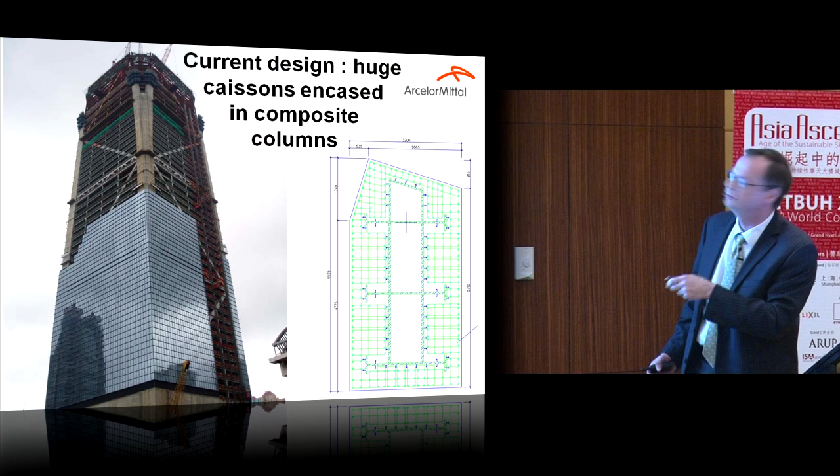Here is a view of the Ping An Center that will be built in Shenzhen, what will be one of the tallest buildings in China in the near future. It's under construction right now, and they are using composite columns. This one is 6.5 meters by 3.2 meters, so it's about a quarter of this room, just one column, using heavy plates all welded together, with all the plates tied together.

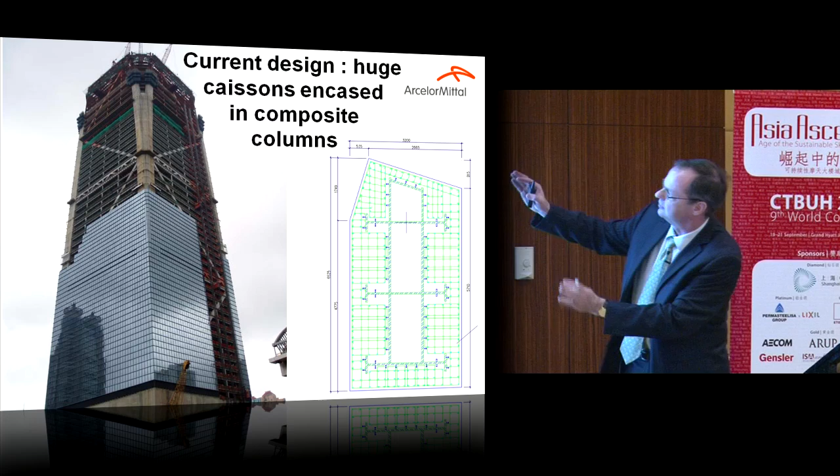So when you have to design this type of connection, the difficulty is there is no exact welding procedure today for how to weld this type of section. Do you start the welding here, or there? And on top of that, how do you splice all these joints when they're stacked on top of each other? It's highly complicated. If you follow the welding codes, here they are using 65 millimeter and 50 millimeter plates. According to the codes, you must preheat the whole section at 110 degrees centigrade before and during welding.

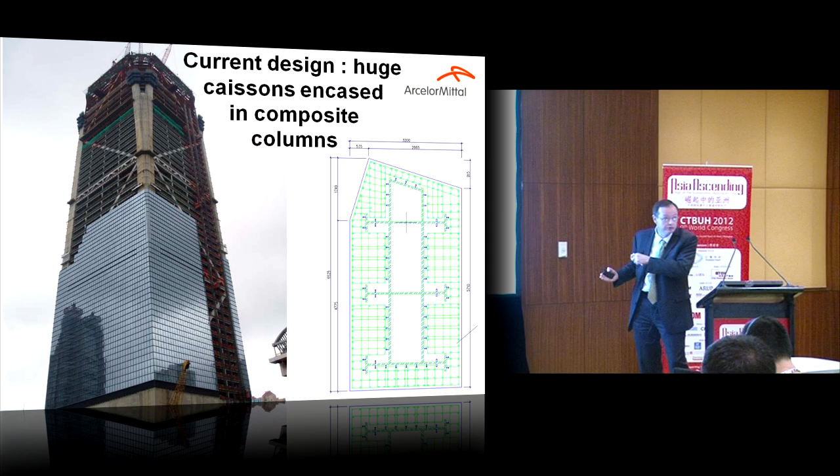So if we go to the Jin Mao, on top here, you can see now how they are building the Shanghai Center. They use the same concept - it's designed by the same designer. They use huge caissons, all tied together to form this mega column.

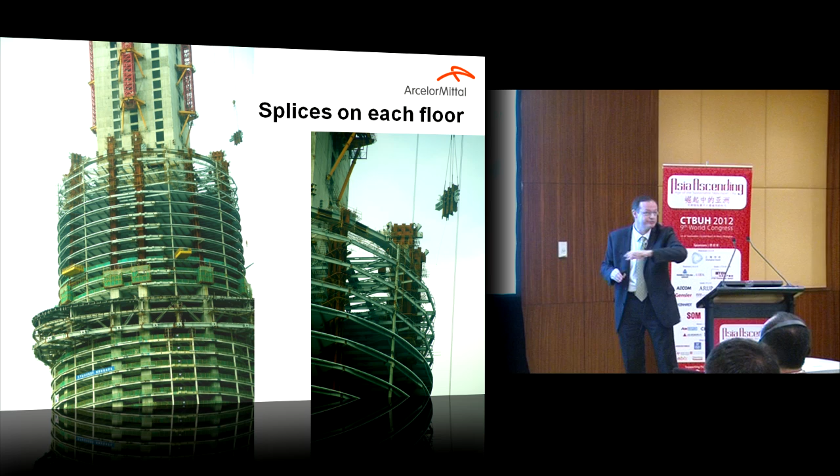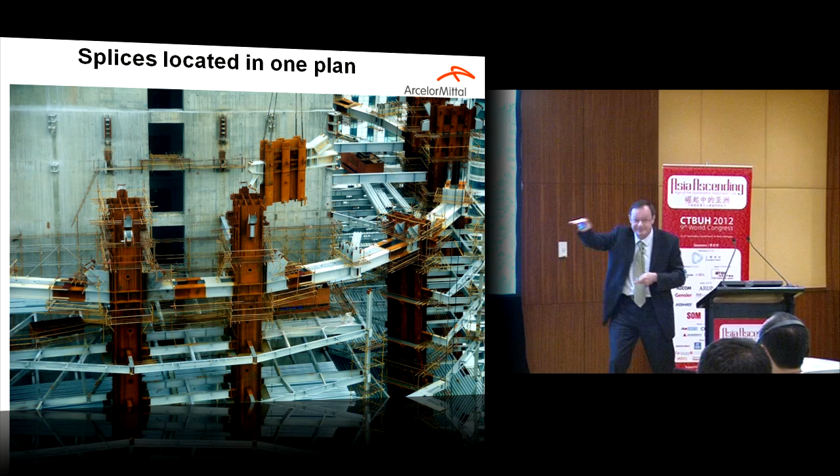These huge caissons are so heavy that they have to stack and weld each floor, because the crane is too small to lift multiple floors at once. I took this picture during February, and here we can see this huge caisson going in, and I saw another one this morning because my room is exactly on the 58th floor, so I can see exactly how they are doing it. So this caisson goes in, and a few minutes later they were welding it.

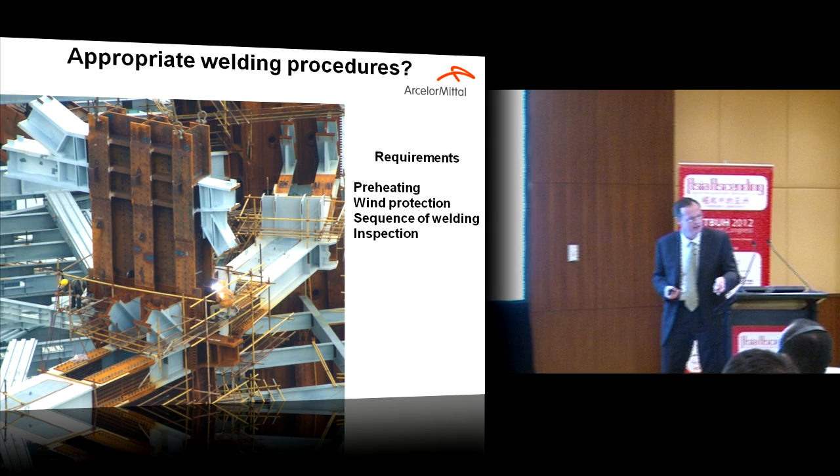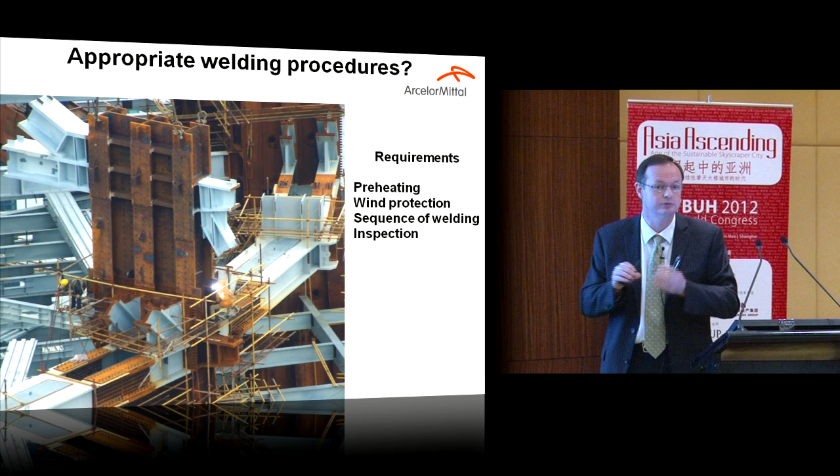At that time, in February, it was 2 degrees Celsius outside, below the dew point. Normally when you take an electrode and touch the steel, immediately you get condensation of water. After Northridge earthquake, and after the Kobe earthquake, they changed the way of doing all these types of connections to control exactly how welding is done.

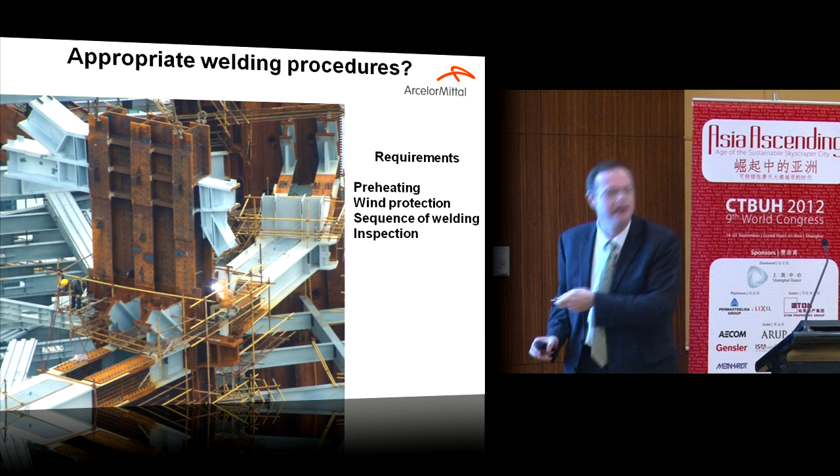So according to the codes, first you need wind protection. You need one guy with a torch to preheat all the connections to 110 degrees. To preheat this type of connection will take maybe 10 hours with a torch, and then a welder can come and start the welding.

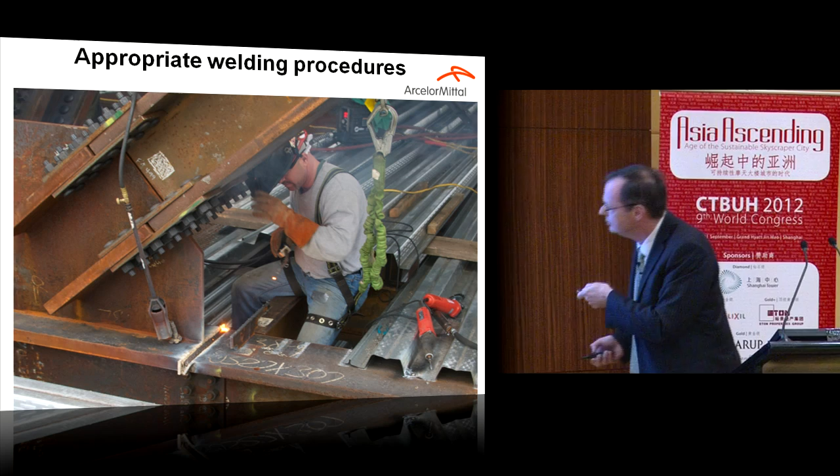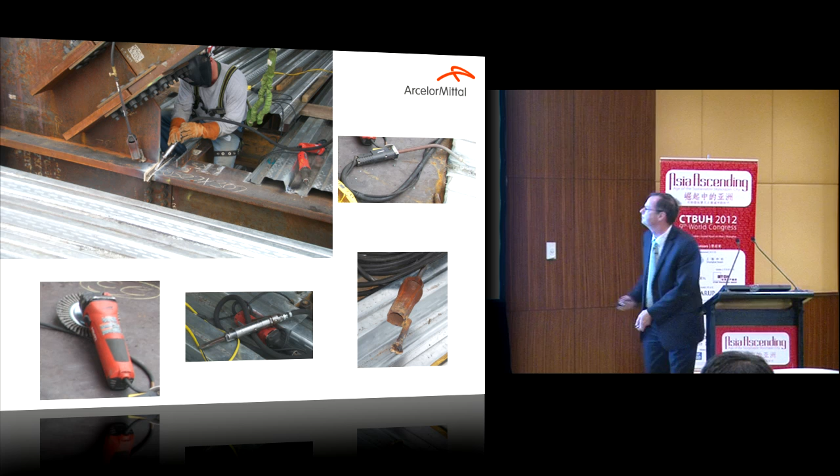If you go to the States - this is from slides from New York, from a new high-rise in the States - when you see a welder, and we will see tomorrow if you go to the job site of the Shanghai Center, they have tools all around: a grinding machine, a hammer, and a torch. Because even if the steel doesn't need to be preheated, you must remove the moisture if you follow the codes, the D1.1 codes, for example AWS. And after each pass, normally you have to remove the slag, so you need a hammer for that.

Here, if you take your ear close to the window of the Jin Mao, in your room, you don't hear anything - just a little bit of how they are doing the welding. You don't hear a hammer, so they are not removing the slag. That means in all the welds today, you have tiny cracks.

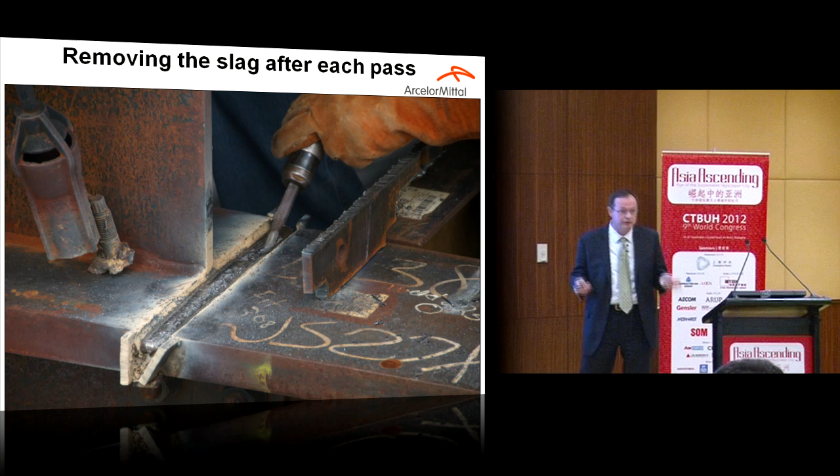Unfortunately, and it's the same in Beijing, it's the same everywhere in China from what I've seen - you need a catastrophe, you need a big earthquake, and after that they will change the codes.

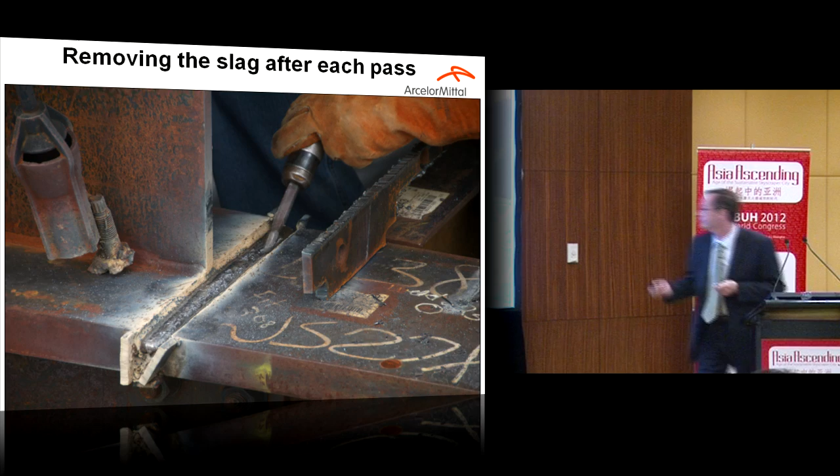After that, you also need to grind the weld to make it smooth before the next pass. And after that, there should be an inspector on the job site who will do a UT test - if you have a full penetration weld, you must do an ultrasonic test.

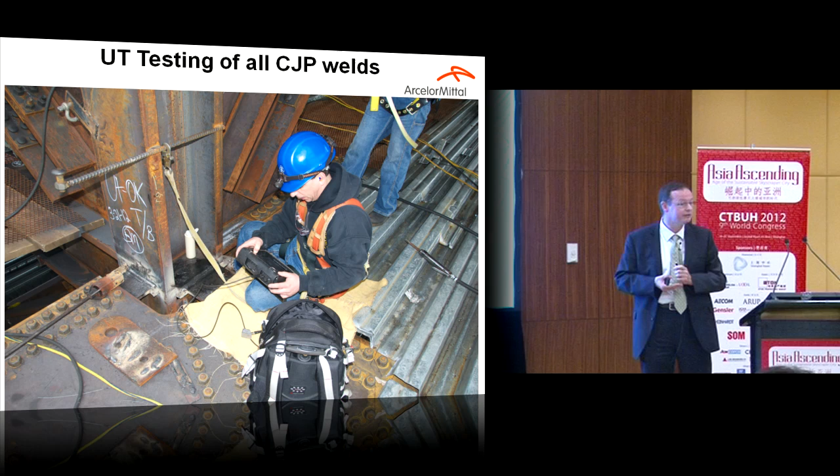When you talk to a steel fabricator in the United States and ask them how many times they have to repair the welds, they say about 10% - they have a defect, then they have to grind, refill, and correct the weld. When I ask Chinese steel fabricators how many times they need to repair the weld, do you know the answer? Never.

So I guess that in the future it will be a big problem once we have a big earthquake here, maybe in Beijing. Beijing will be the big one, and maybe in Shanghai.

Today we have high-performance steel available, and since the 90s we have even 460 megapascal steel, produced with a quench and self-temper process, which has very good ductility and very good weldability, and doesn't need to be preheated.

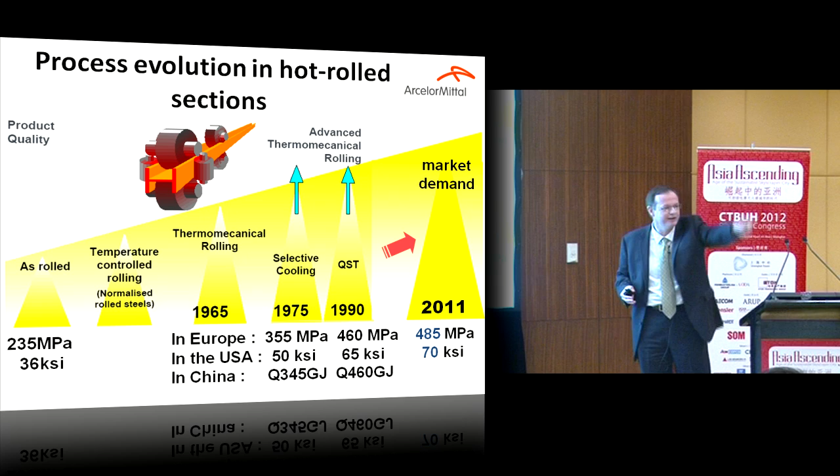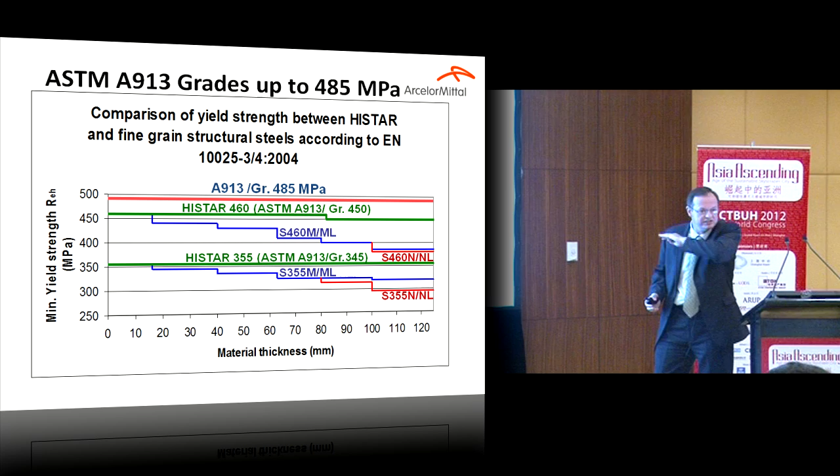We can produce steel available today in different grades. In the Chinese grade, and it's the same in Europe, the yield decreases with the thickness of the material—if you have thick material, the yield decreases. But in the United States, we can supply steel with the same yield for all thicknesses.

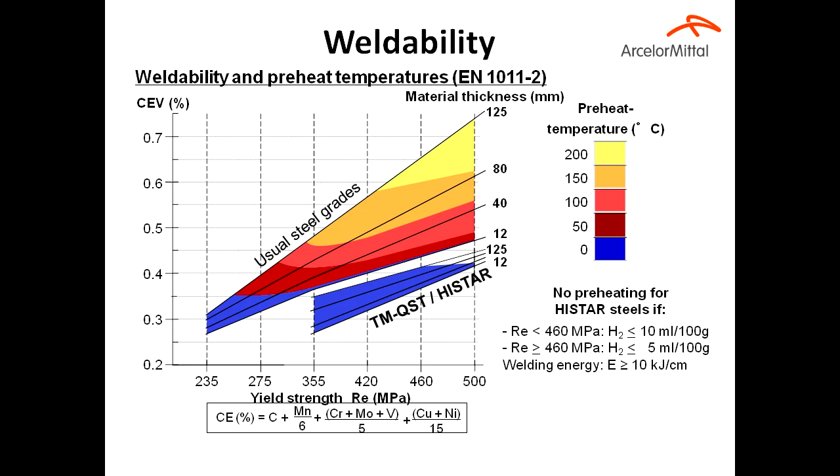When we have to increase the yield of the steel, we have to change the chemistry—we have to put more alloying elements into the steel. If you use the classical way, what we call thermomechanical steel, for thick material you have to change the chemistry so much that the steel is not weldable anymore. This is why you have to preheat the steel before welding.

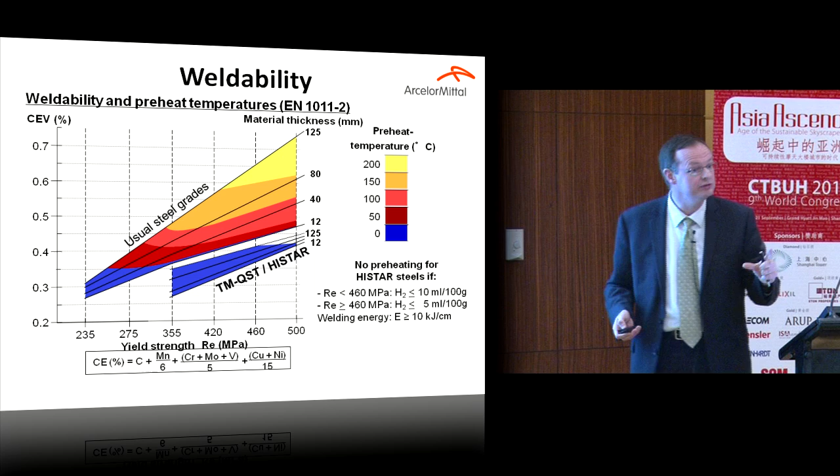By using the quenching and self-tempering process, we can produce high-strength steel with very good ductility and very good weldability. This is an example of a splice in a jumbo, which I think is what we supplied here in this building—this is 125 millimeters thick. If you use a normal 355 megapascal steel, or Chinese plates available here, you must preheat that at 110 degrees before welding, before the first pass.

So it takes about 5 hours with a torch, just doing that. And then to do the welding of that, do you know how many passes you need? Can anyone guess? It's 140 passes, so it's a lot, right? And it takes about 8 hours for one jumbo like this.

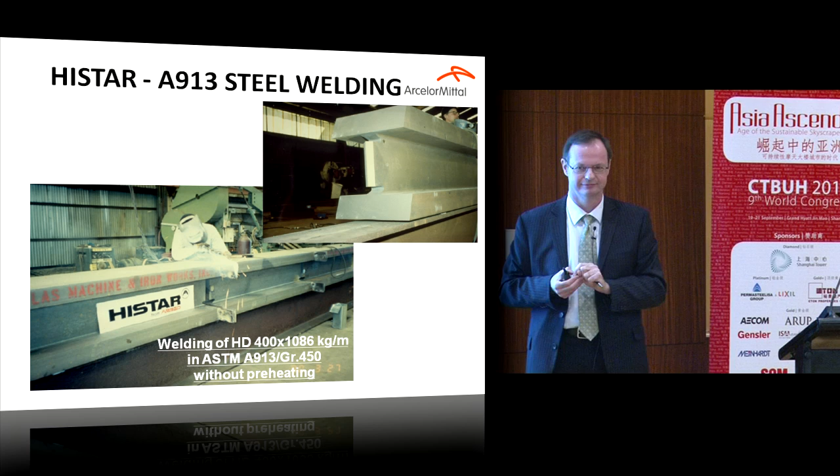Now imagine the huge caissons, because they are also using 65 mm plates. To do the welding, if they really follow the rules, it will take days. And I checked—I came 2 days ago—they did one in one night. One caisson was welded during the night.

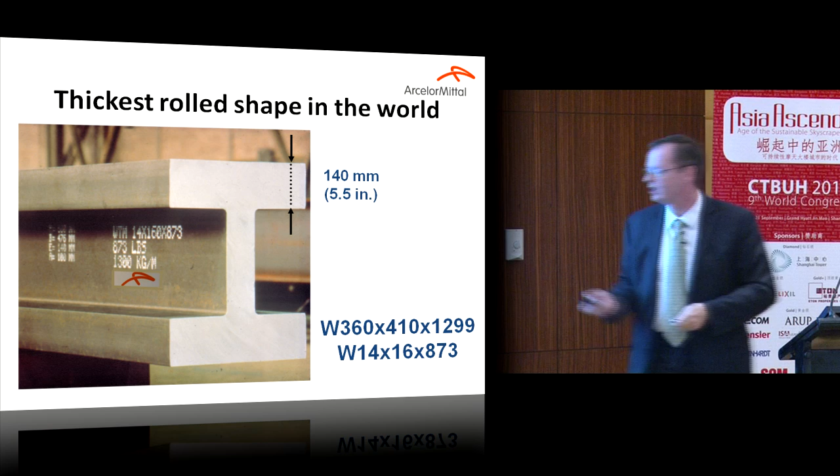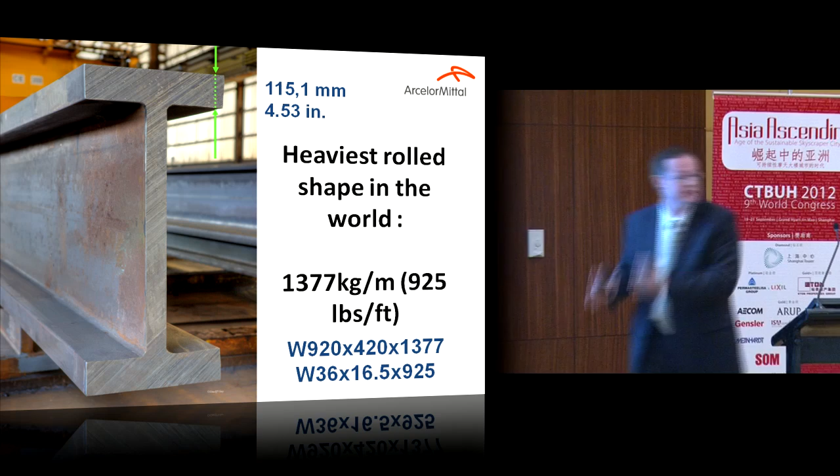We can supply heavy sections like this up to 140 millimeters thick, and we can go now today up to 485 megapascal. This is the heaviest, what we call jumbo. And this is the heaviest beam, a W36, at 1,377 kg per meter. So you can use that, and it's a finished product.

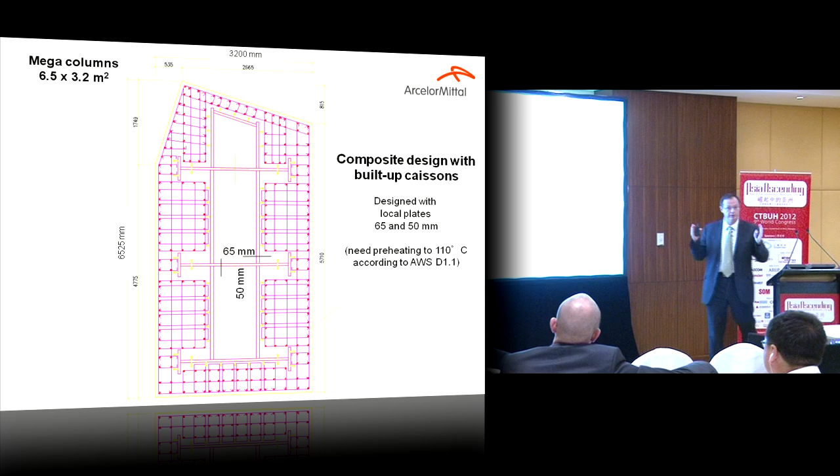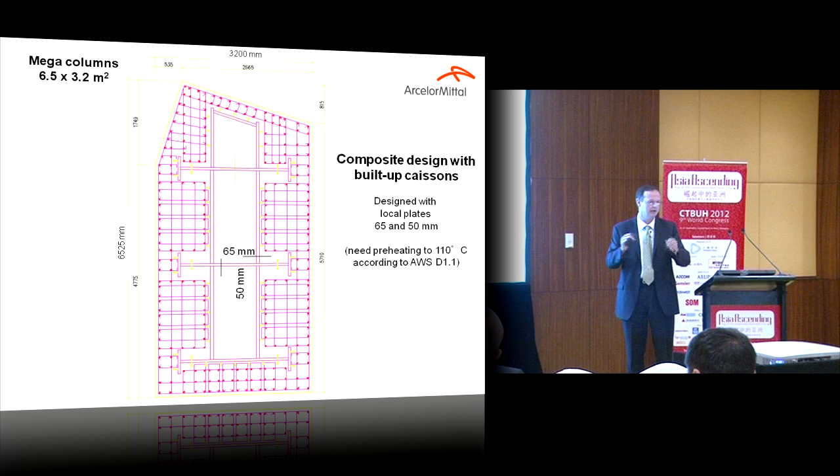So instead of using these huge caissons, in LRFD today they say you can use composite design with untied sections, built-up or rolled sections inside the composite section, as long as you check that there will be no buckling of the individual member before the concrete is dry. This is the only thing you can find today in the LRFD design code—they do not explain how to do the design.

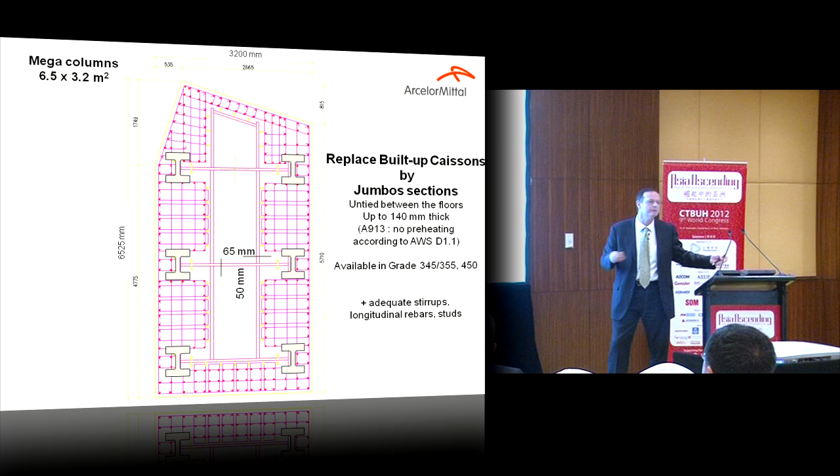So we developed a method to replace all these caissons by using roll sections, and we follow exactly all the rules given in LRFD or ACI 318, and they are based also on the examples given. You can download them—it's example number 14 from AISC that you can find on their website. So we developed this method to calculate the sections, to calculate also the stud connectors, the plates, the stiffeners, in order to transfer the loads.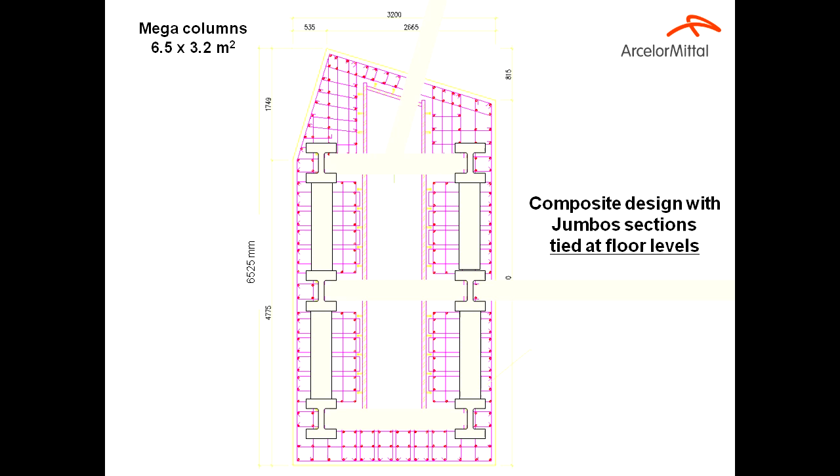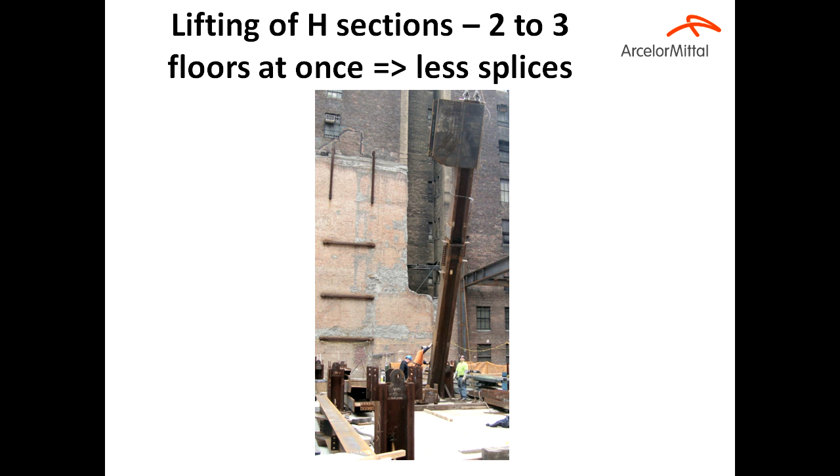We don't see it very well here, but we can use double layers exactly like in the Shanghai Center, or single layers. The advantage of using roll sections is that you can lift 2-3 floors at once with a 20-ton crane, instead of lifting one floor at a time and having to splice every floor.

This is the Freedom Tower. This is 541 meters.

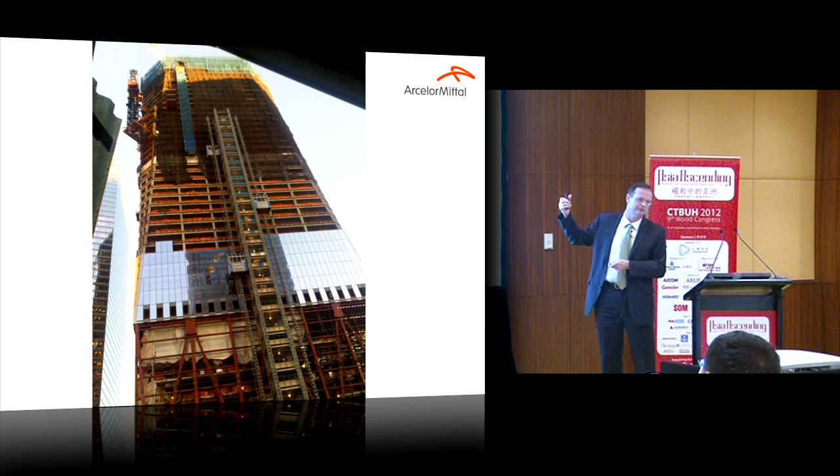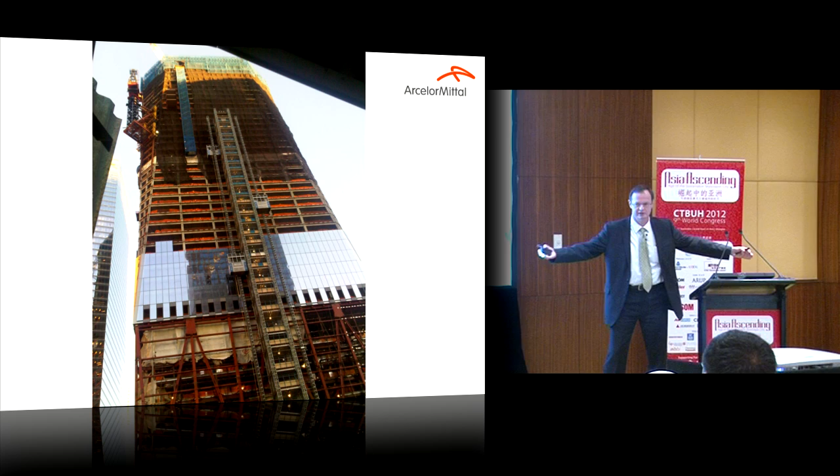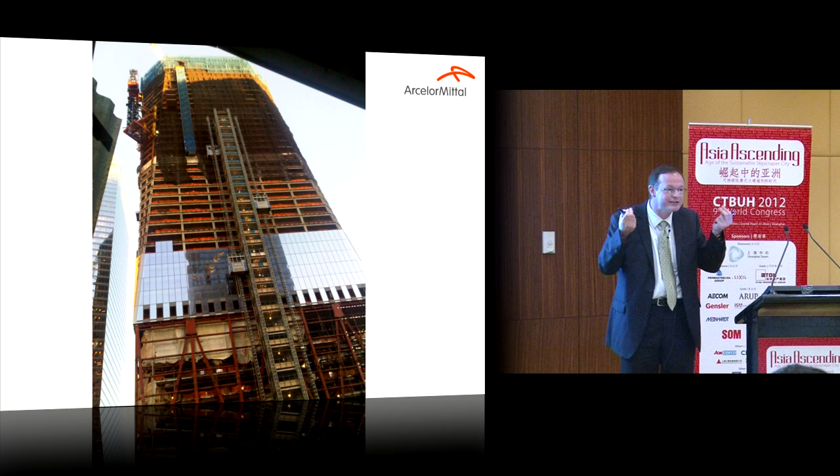The World Financial Center is 492 meters. Here, they are not using big mega columns into the corner. The architect should not put big columns into the corner. If you want to rent an office, if I'm the boss, I want a corner office with a window on the left and the right. If you put a big concrete composite column into the corner, you are wasting the most expensive place in the building.

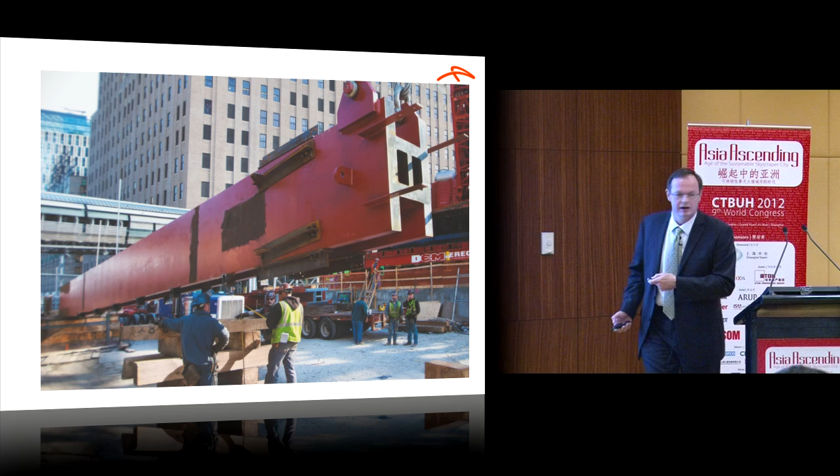So in the United States, they always try to avoid columns into the corner to have the best view possible. For this column, in the basement of the World Trade Center 1, the Freedom Tower, they use 460 megapascal jumbo beams, the same as in this column here, with welded plates in 460 megapascal. This is 30 meters, just one column, for the erection of one column.

To do the welding here, the codes say this doesn't need to be preheated because it's a quench and self-temper material. This needs to be preheated according to the codes to 150 degrees because it's 460 megapascal. So they had to preheat everything at 150 degrees, and the port authorities say you must preheat everything just to be double safe.

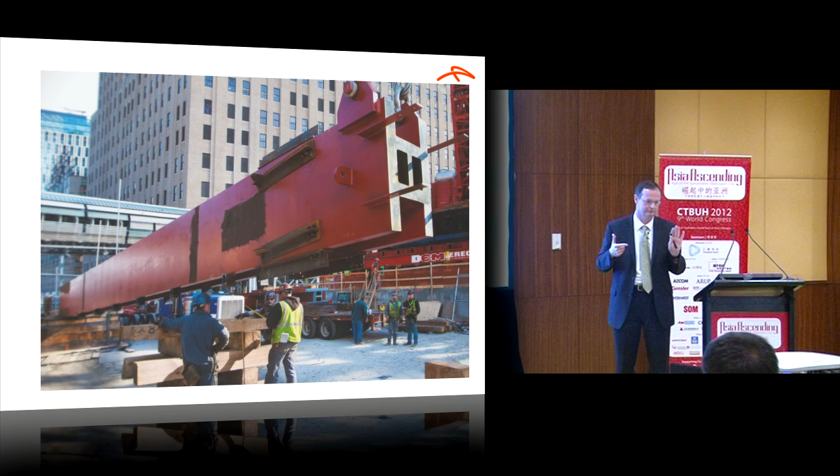This building is the safest building on Earth today. And you know how long it took them to do the welding? 7 days, days and night, following the codes. I asked different steel fabricators in China, and they say, oh, less than 1 day we do it.

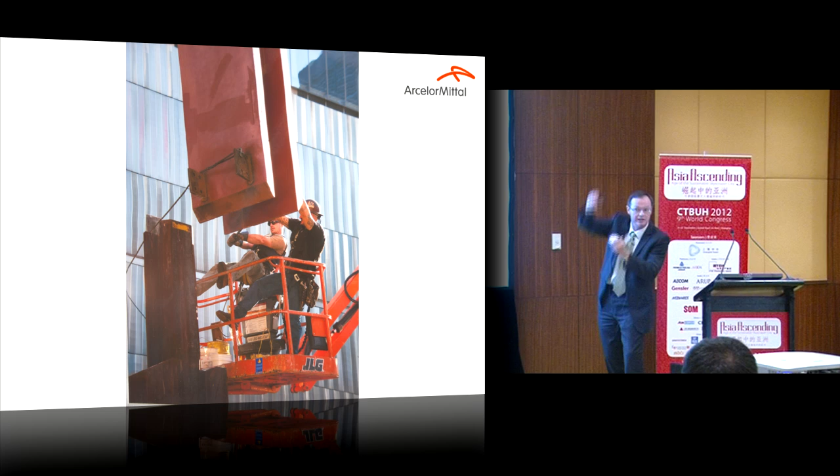On top, when you splice all this column, don't put all the welds in one plane, because if something happens to the weld, the crack will go through that plane. So in the Freedom Tower, when splicing the jumbos with the plates, they put the weld of the plates here, and they weld the jumbos here, at two different locations, to have a much safer structure.

This is what Northridge taught us. When you have to splice two jumbos, you must do what we call a rat hole - access the web, not putting weld in this region because you have a high level of stresses.

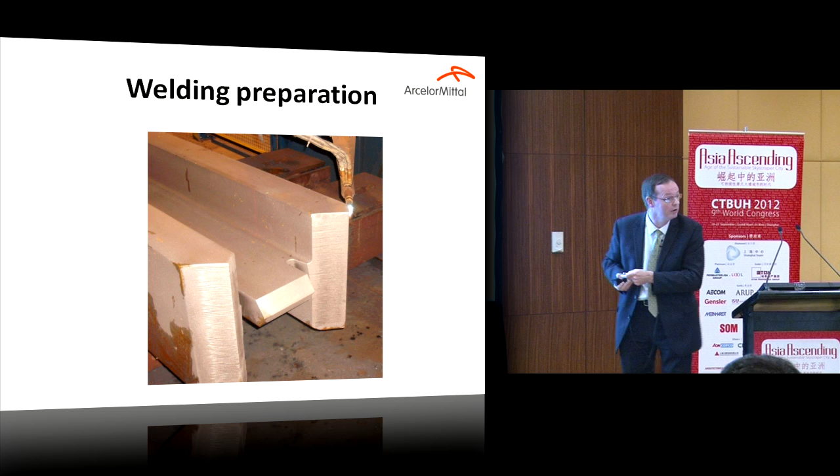When they weld the caissons, first they do a bevel. The code says above 10 millimeters, you need a bevel if you want a full penetration weld. Here they are welding just a small gap, filling a small gap between two heavy plates. So you need to do that, and you need this type of hole to limit the residual stresses once the weld shrinks.

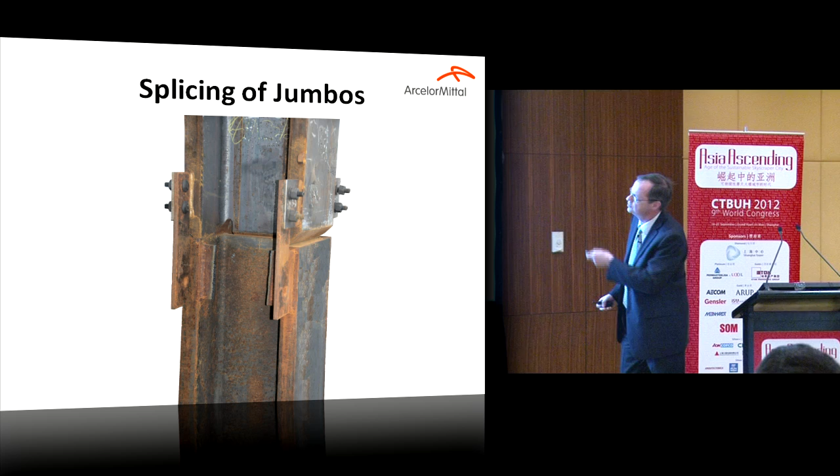So this is how the splice will look in reality. You have two jumbos. This will be removed, and this is the type of typical splice we have seen for many, many years now. This type of connection, we can teach easily to the inspector on the job site here in China, and he will see, this is how we have to do it, and then they will apply it easily.

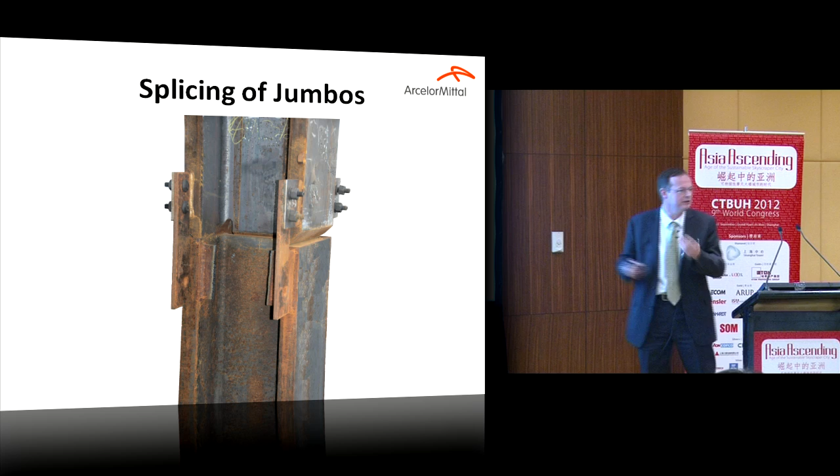So now I'm coming to this method. This is technical - I hope you are structural engineers now, and not only architects in the room, otherwise you can leave and go somewhere else.

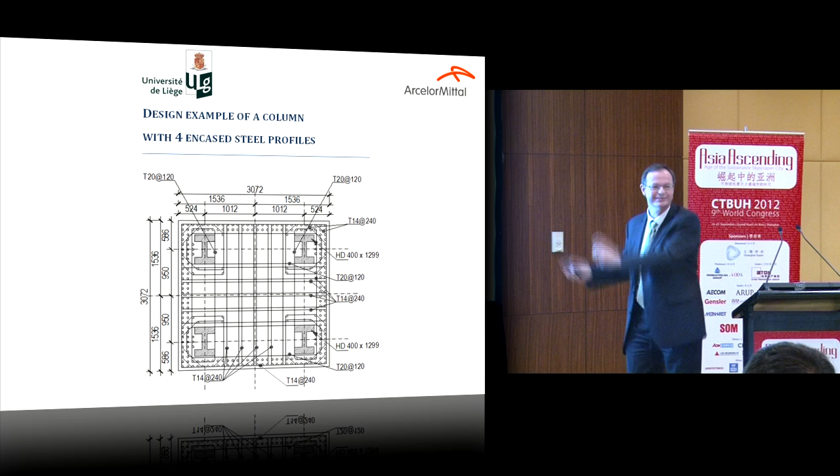So we developed this method. It's about 70 pages that you can find on our website, or you can ask me and I can send you a copy. We did 4 different examples: one according to the strong axis, one designing the N-M curve according to the weak axis, and then two design examples to calculate the shear forces.

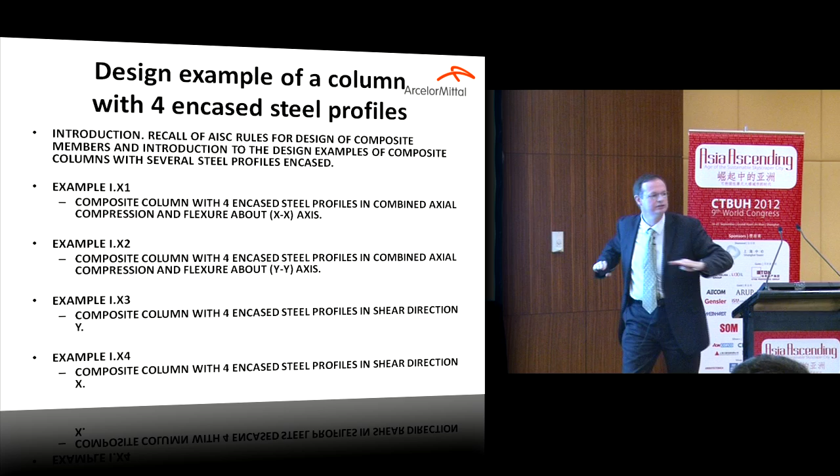We're not using new things, we are just using what already exists in LRFD or ACI 318. You know that Roik and Bergmann, in '92, invented a simplified method to calculate the N-M curve. We are using exactly the same thing.

So the N-M curve looks something like this, with axial forces against bending moment. Roik and Bergmann said, instead of calculating all the points, we calculate only four points on this curve, then draw a straight line, and that gives us the N-M curve, describing how to find it directly using different jumbos, multiple jumbos into the composite sections.

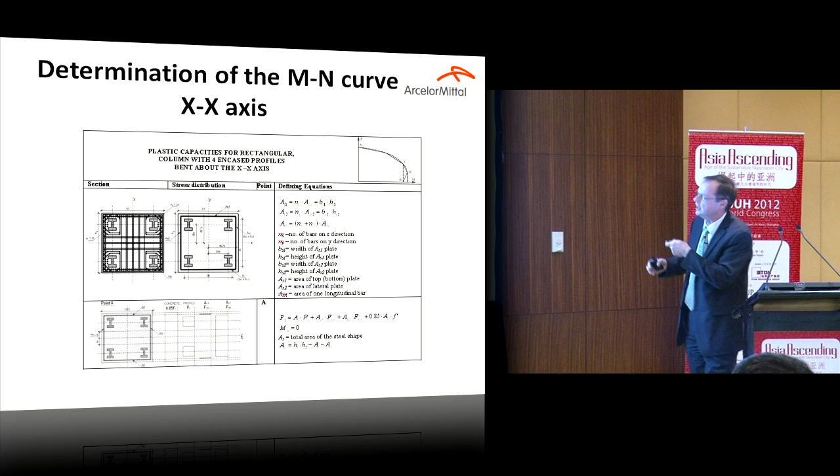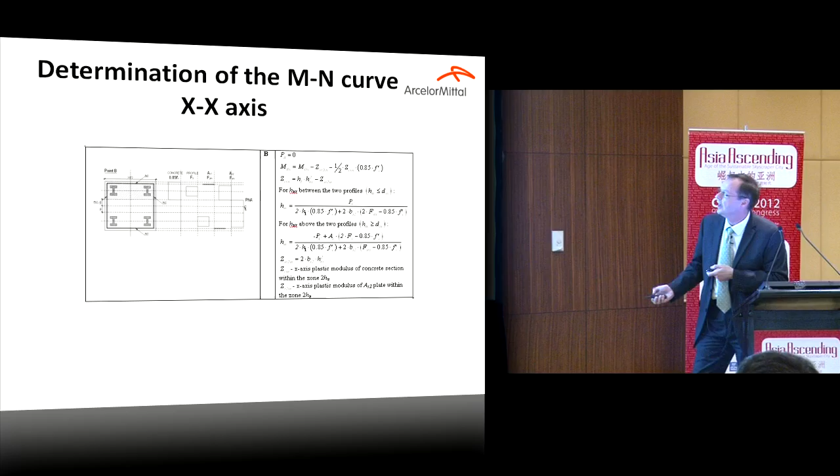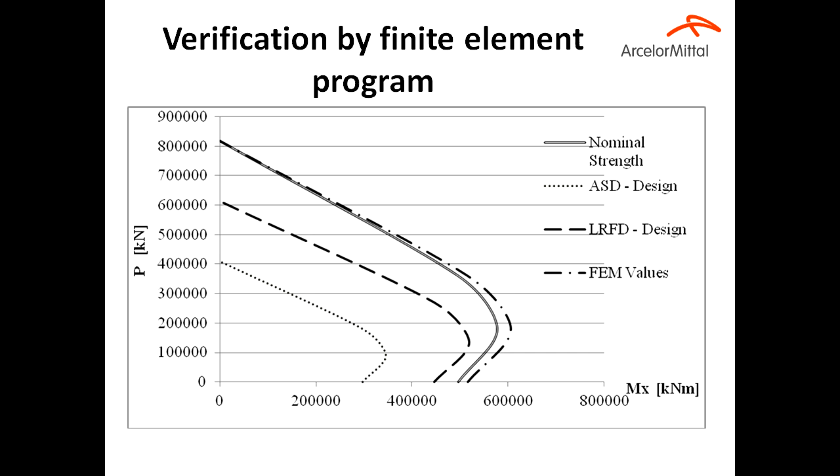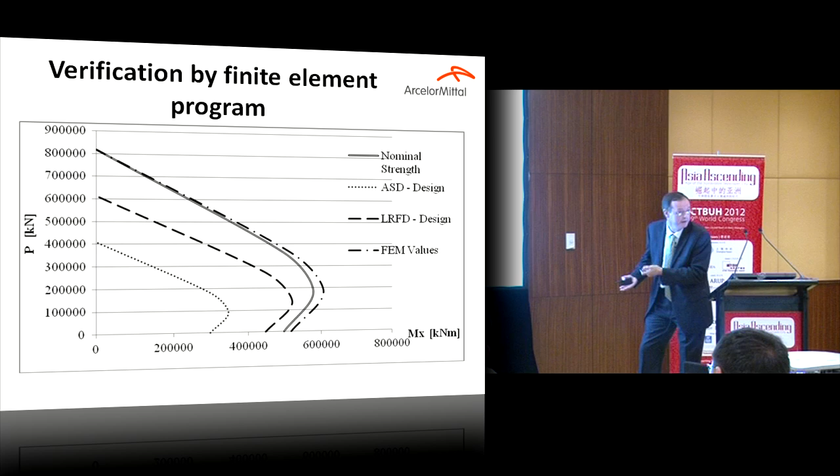We did that according to the strong axis, calculated the N-M curve, and also did finite element analysis to prove our simplification using this method was correct. Here you can see the finite element analysis, and here the simplified method. After that, with the LRFD design, you apply the safety factors to obtain this curve. If you use the ASD design, you get a smaller curve. So it's not too complicated.

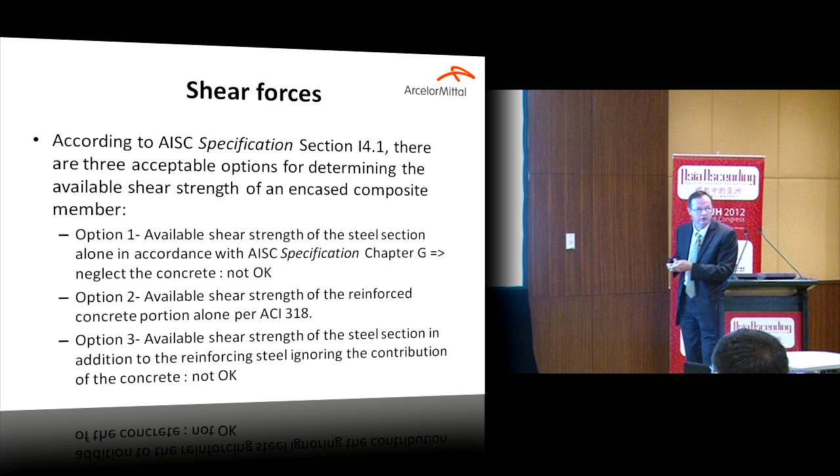So option 2 is to say we are using the reinforced concrete portion alone, and we use ACI 318, which is the best solution and the only solution.

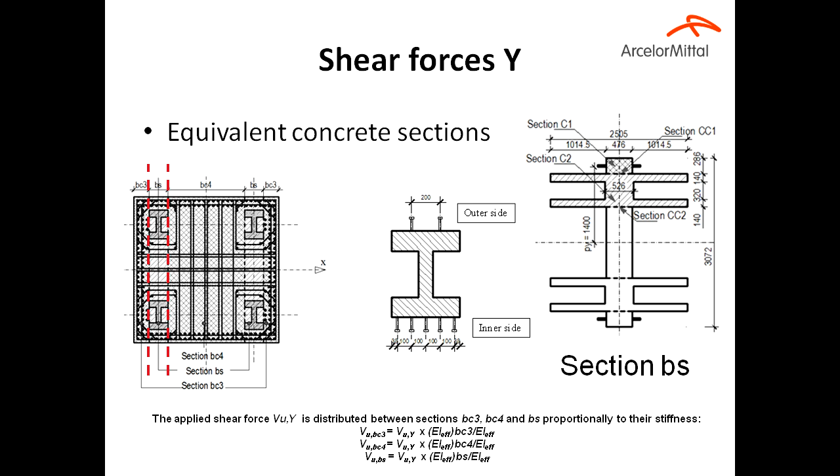We developed, and I will not go into detail here, how to do this equivalent concrete section. Once you have a composite section, the shear forces can be proportionally distributed according to the stiffness of the different portions. So you have this portion here, it's only concrete, then you use ACI 318 to design it, very simple. This one in the middle is also concrete, so it's easy. This one is the most complicated one because you have concrete, steel, concrete.

So the idea is to replace the steel by an equivalent section in concrete. If I take this section here and replace it, you have concrete, you have the rebars, you have the beams here converted into concrete. It's a simple method. Then the concrete, and then again the steel.

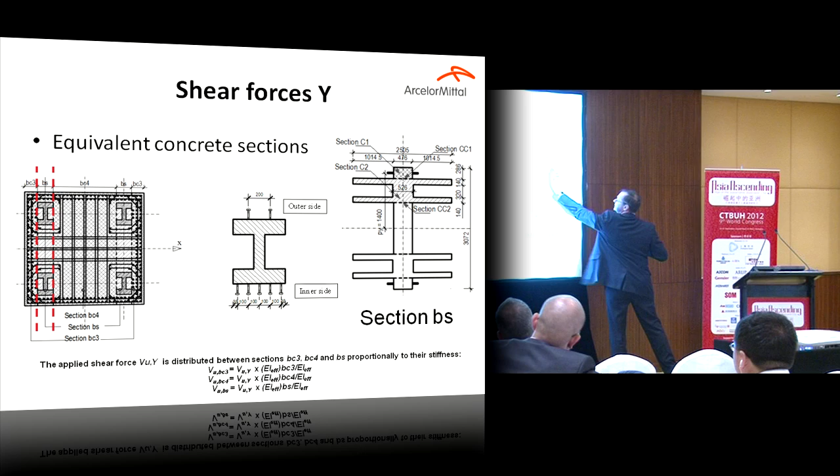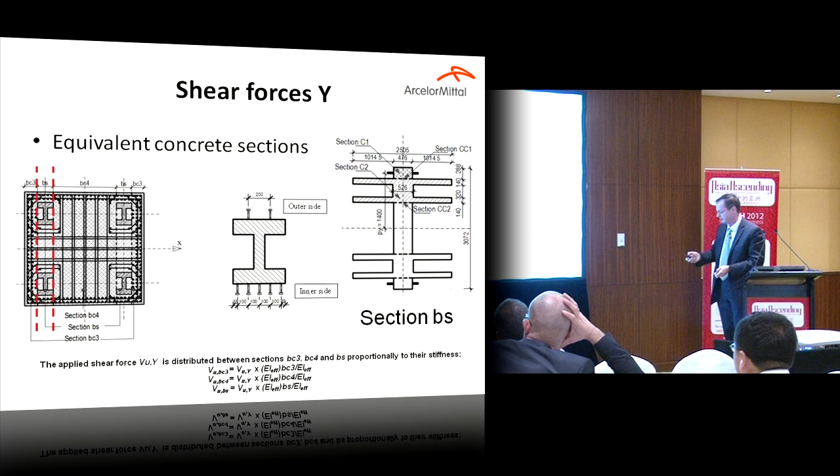So when you have the shear forces, we are also calculating the number of stud connectors that need to be put here and here. We give all the methodology to calculate all the shear forces. If you have shear forces like this, you have the same shear forces like this, so you need stud connectors in the other direction to distribute the shear forces along the longitudinal axis of the column. We explain how to calculate these stud connectors, and we also check at this zone how many stirrups or ties you need to distribute the shear forces into the concrete. So everything is explained, the same thing in the other direction.

So for this zone, we are replacing the steel by concrete, and we are measuring at different sections all the shear forces to determine the amount of stud connectors and the amount of ties that you have to put.

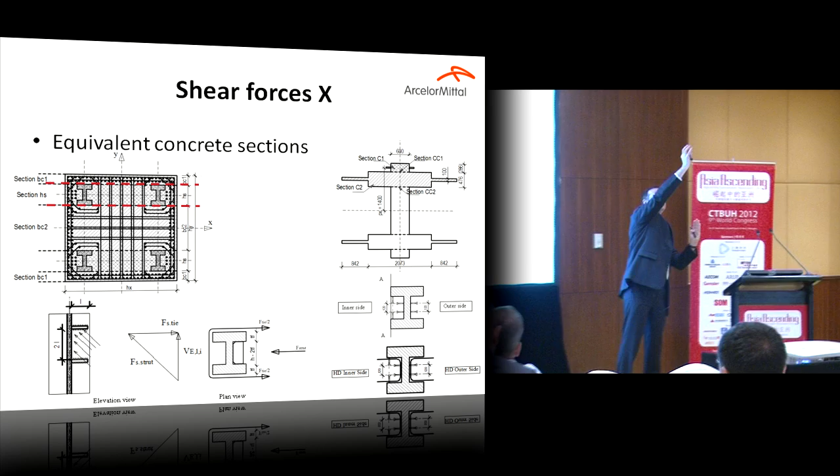Another solution, instead of stud connectors, is to use a plate. Because if you have a composite column like this, to transmit the forces from one beam to the other, if you use plates in the chamber of the beam, you will have like a truss in concrete inside the composite column.

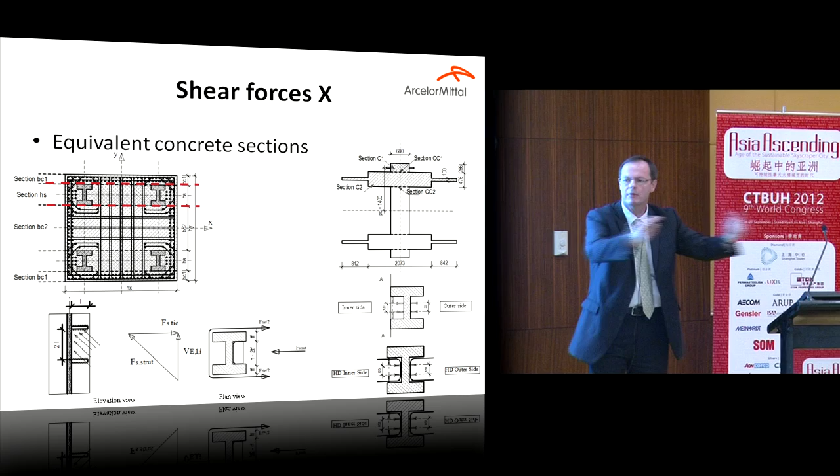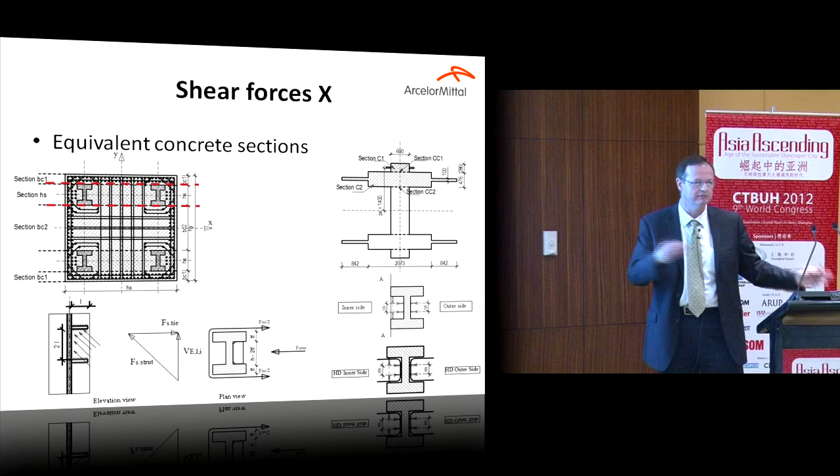So we are designing this truss using a very simple triangle equation to find the loads that should be transmitted through the truss, and then we determine the amount of ties that we need to put into the composite column. So the method is not a new invention, it's just using simple equations from LRFD, ACI, and based on examples existing in AISC version 14. With that, you should be able to design much safer buildings than what we can see today.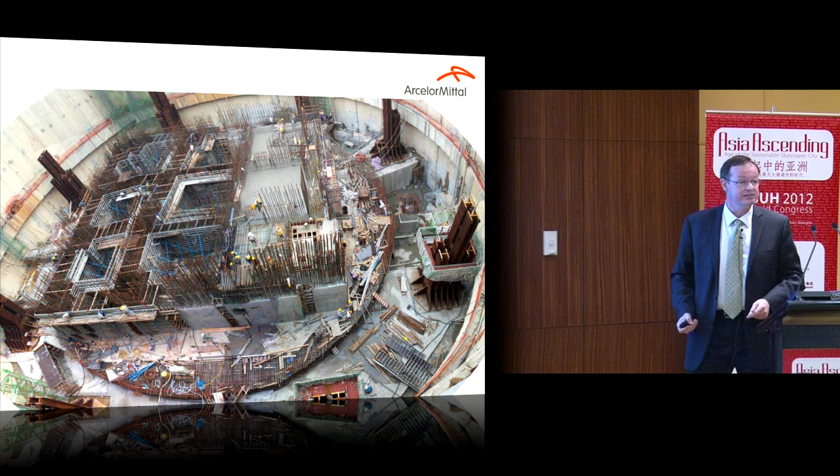There was one example like this. I don't know personally who was the designer because this is not our steel, this is Japanese steel, so we cannot win all the projects. But they use the same concept.

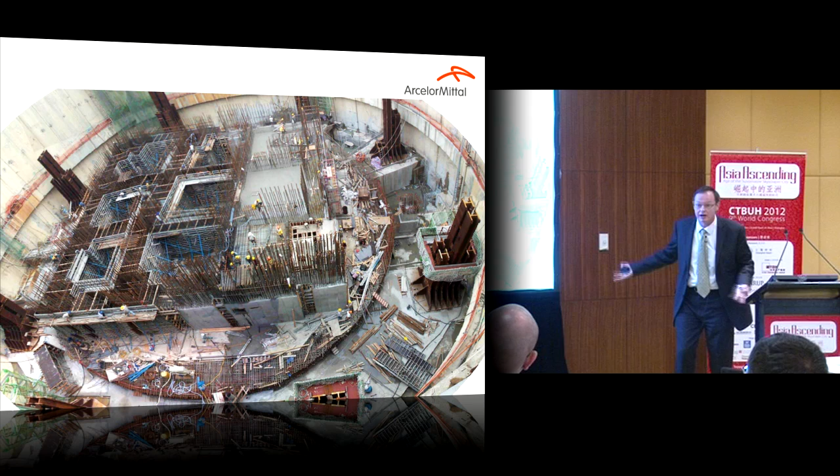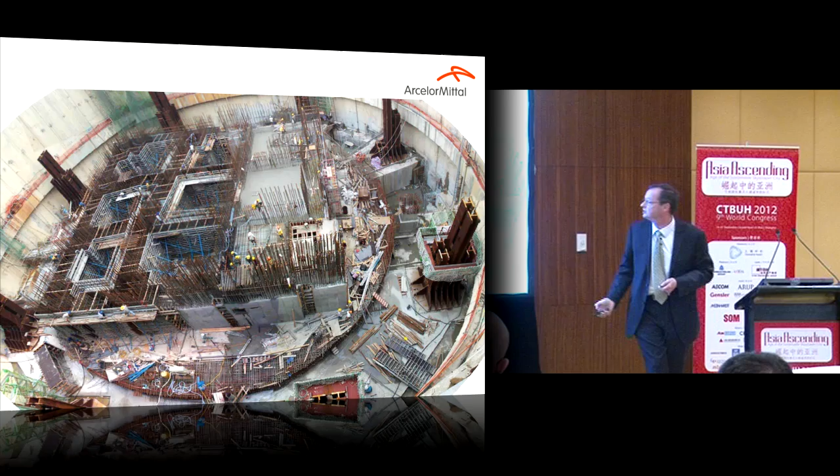This is the IFC2 building in Hong Kong. Very nice concept using multiple shapes. There are build-up sections here, not standard shapes, but they use the same type of concept using multiple sections. You can see it's very fast to erect, much faster than what we see next door, because you take one beam and you immediately have 3-4 floors. You see it's untied between the floors, just putting the transversal beams to tie them to the floor.